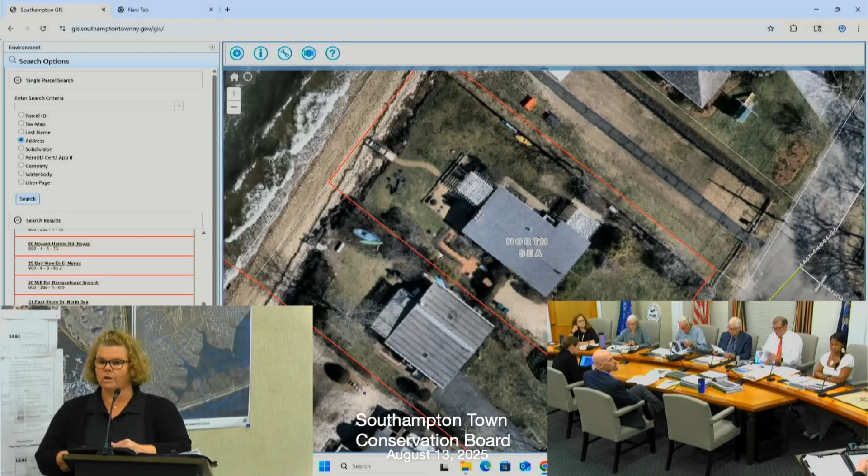So we last met on this project back on May 14th to begin discussion on our application that was filed on June 10th of 2024. We had requested an adjournment for the June 11th hearing date on June 10th.

And this morning at 10:09 a.m., I was provided a sketch by Mr. Shea of an alternative plan dated June 10th. This was not previously provided to me, so it was given to me this morning, but was done two months ago, effectively. So as far as a response to that, that doesn't really give me a lot of opportunity to digest it and actually respond to it.

But at first glance, I don't believe the plan really makes much sense. It insinuates that the existing lawn is higher than the beach by a significant amount. The beach is at elevation 3, with the grade in the existing lawn between 5.5 and 6.5 feet above sea level. But I'm going to go back to that in a few minutes.

So at the last meeting, we discussed the elevations of the five other properties to the north where similar shoreline protection structures were approved by this board between 2018 and 2021. In reviewing the surveys for those projects available in the town GIS, there's no significant difference in elevation between 37 East Shore Drive and the five others to the north — those properties being 43, 47, 51, 57, and 59 East Shore Drive. All of the lowest elevations for the five other structures begin at around elevation 3, 4 in one circumstance, I believe, and go to a maximum height of elevation 8.

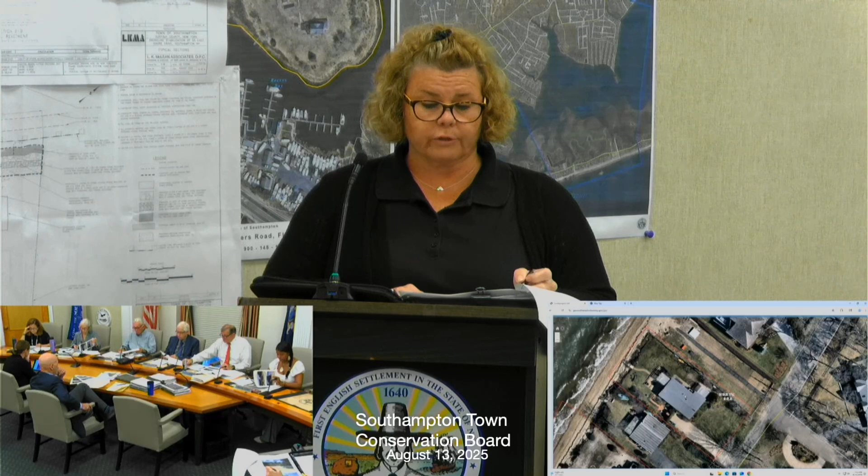Beyond that, you also see the beach has a large amount of cobble closer to the revetments, and then some sand with a mix closer to the water. You see that in all of the photos I'm submitting, which represent 1,000 linear feet of beach in this area, going from the end of the bulkhead, first association access way, all the way down to 21 East Shore Drive.

I wanted you to see this in the summer, because my photos submitted last time were from the spring, so they didn't look as lush and vegetated. You can see the beach grass behind these is thriving, and the rocks in some cases are a little more angled, but in most cases they're stacked one on top of another in a wall situation.

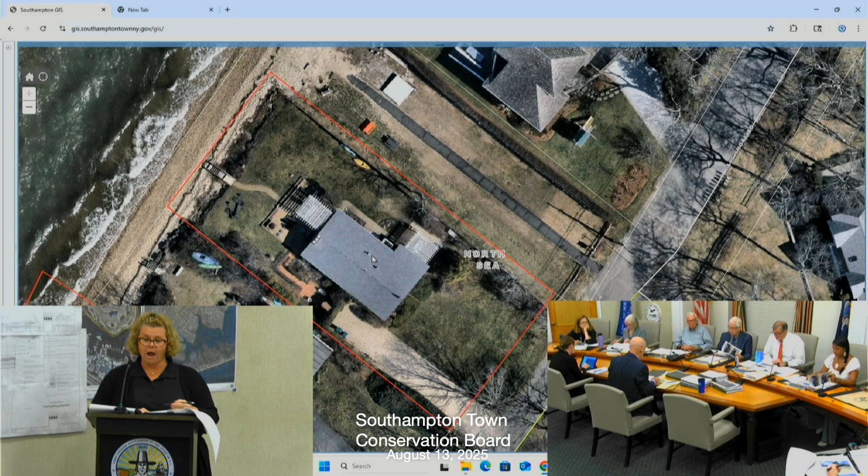I wanted to show the consistency of the width of the beach throughout these photos and the consistency of the makeup of the beach, in that the higher beach area is mainly comprised of cobble, and between the high water mark and that cobble is largely sand. Seaward of mean high water, you start to get more cobble within the water.

That 1,000 linear feet stretches over 11 properties and the association access. That's between my property, my client's property, and 43 East Shore, which is the first and most recent rock revetment that was allowed.

So all of that being said, Marty provided me with a plan that I believe you should have in your file. I don't see it actually. Is this in here? It looks like this. Okay, yes, along with a survey that he designates the areas that he's drawn.

He's proposing a 3-foot wide by 5 to 6 foot high berm of cobble, roughly 2.5 inch to about 5 inch diameter cobble, with a 20-foot wide vegetated buffer beyond that. He's also proposing depositing cobble and sand and planting within that cobble and sand to replace existing lawn.

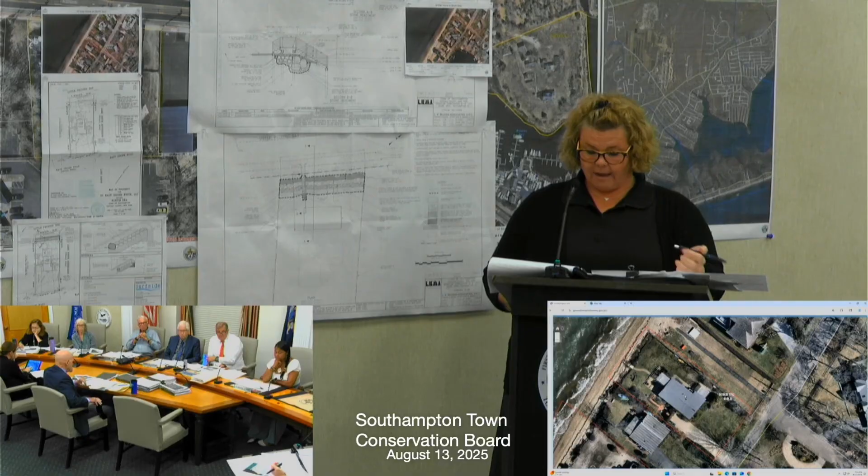We discussed cobble and sand over the rock to be planted to stabilize it. We also discussed the loss of property — we estimate about 8 feet of the property was lost between 2018 and 2024. So the goal here is to maintain what was lost before it gets worse. There was no structural peril on any of the 5 properties, nor is there structural peril on this lot. But the goal is to prevent further erosion of the land. Lastly, the New York State DEC granted us a permit for this with no questions asked on October 16th of last year, so we're sitting on that permit.

Otherwise, I'm here tonight with Nika Strunk, who would like to make a presentation, unless anyone has any questions for me.

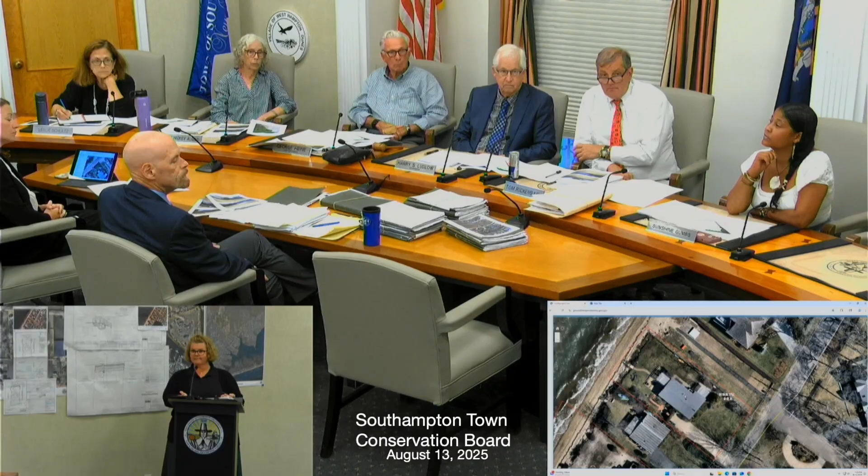It seems like, from what I'm hearing, the thrust of your argument that justifies this project is based on the history of what this board has done on other lots north of this lot. Yes and no — I mean, yes, of course, but also I'm trying to show you that this lot is not significantly different in elevation and grades than those other ones that were granted. There's no natural significant difference between this property and the others.

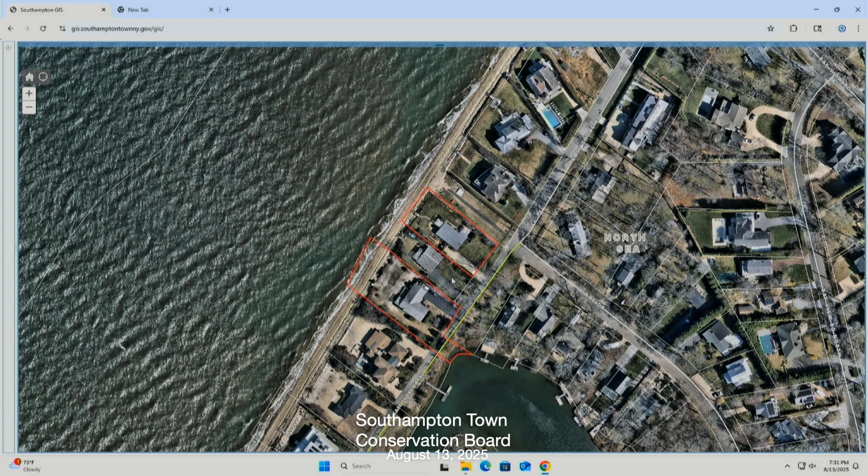And lastly, as a matter of law, which is the reason that I've been brought in here, this board is required to adhere to its prior precedent. It has to treat all applicants equally. I have 2 cases cited in my letter.

One is Hamptons LLC versus Rickenback. You have the cite in there, your counsel can review it, where a special use permit application was, quote, virtually identical to that of a similarly situated property owner in the same zoning district, whose application for the same special use permit had been granted by the appellants. A denial would have been arbitrary and capricious.

There's also the decision of Knight versus Amelkin, from the Court of Appeals, the highest court, that says a decision of an administrative agency which neither adheres to its own prior precedent nor indicates its reason for reaching a different conclusion on essentially the same facts is arbitrary and capricious. So I submit that as a matter of law, given this board's history of allowing property owners on this very, very vulnerable stretch of beach to protect their land, it would be arbitrary and capricious not to grant the application.

And I'm just going to make a little correction to my letter, and I'll submit it this evening. Thank you very much. I'm just going to write my name here. And I'm happy to answer any questions that you may have. Thank you.

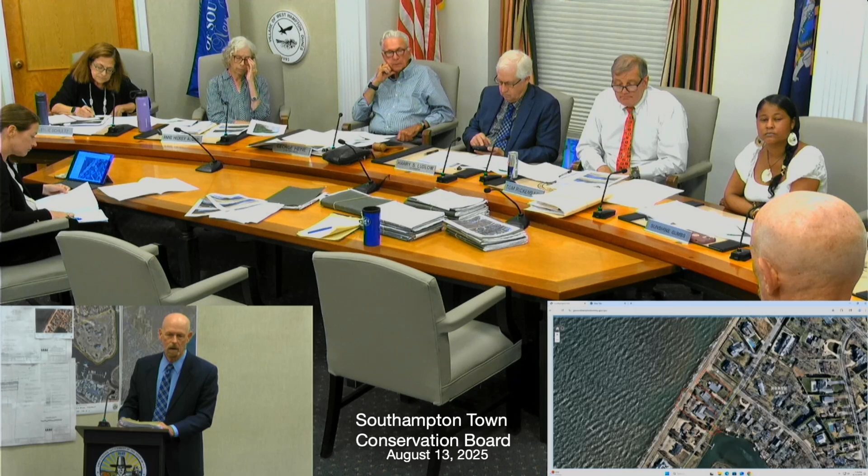Good evening, Marty Shea, Chief Environmental Analyst for the town. Erosion is a natural process. It occurs along every bay beach, along every ocean beach. You have a seasonal change from winter beach to summer beach, periodic storms. The erosion that occurs along beaches is not something that's artificial. It's part of how the natural Bay Beach ecosystem functions.

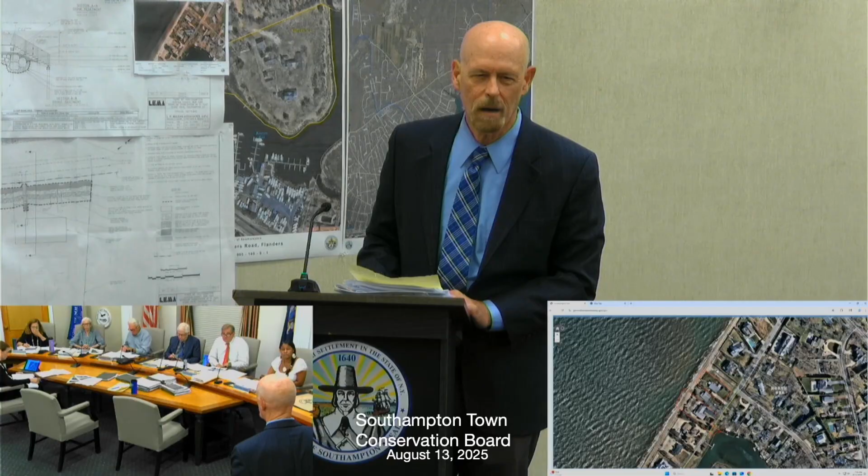The degree of erosion at the subject property right now is not significant. The escarpment is about 1 to 2 feet. The home is actually located outside of the FEMA flood zone, and the improvements are located significantly landward of the beach. So they are at present at no risk of flood or storm damage, nor is there any evidence of some recent damage occurring to those structures as a consequence of winter storms.

While the site conditions at every property are somewhat different, just quickly touching upon the permitting of rock further north, much of that I believe was done as a response and reaction to the court-ordered construction of a 6-foot-high concrete wall at 55 East Shore Drive. There was significant concern on the part of some that the presence of that seawall, which this board did not permit, would have

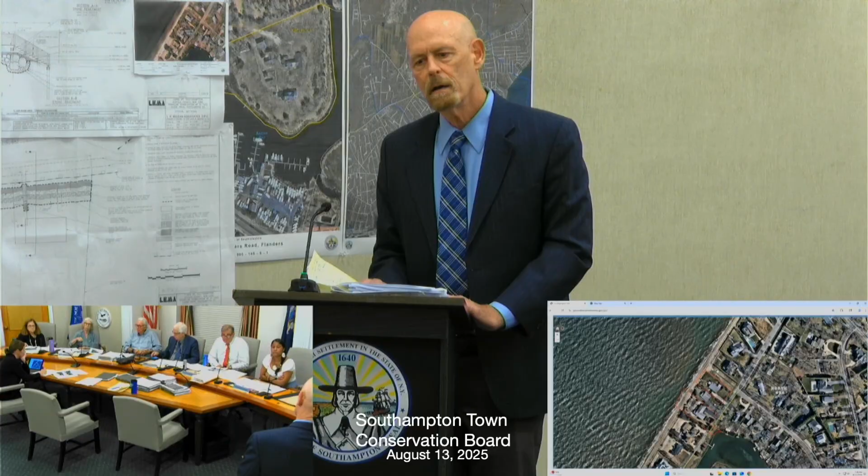potential significant consequences in terms of downdrift erosion. And I think for that reason, the board was kind of in an awkward position. They had to respond partly to proximate neighbor concerns about what impacts over time the presence of that court-ordered concrete seawall on the beach would have in terms of downdrift effects.

When we get an application like this, consistent with the wetland permit issuance standards, there are a number of issues and factors that we need to consider. First, we need to look at whether or not the project plans are reasonable and necessary, considering the present beach erosion and escarpment conditions. And they certainly don't appear to be, there certainly doesn't appear to be a need to do something as drastic as to install heavy rock stone and rock armor along this beachfront.

One of the reasons why there's been some erosion is that this landowner has been looking to continue to maintain a lawn extending from the residence right out to the beachfront. Lawn is very shallow rooted, so when you get a significant storm event and the waters come up high on the property and lap over that edge of lawn, there is nothing to hold the soil together. The lawn easily collapses. And I saw this after Superstorm Sandy when I visited countless waterfront properties that had lawn going to bulkheads or going to beach, they were the areas that were most impacted by storms, whereas properties that had naturally vegetated buffers suffered little or no impact.

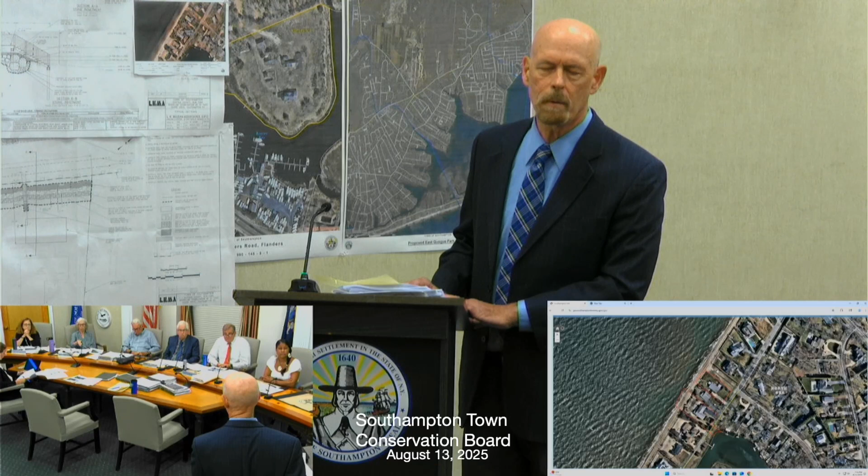So when you change that area by installing rock, you're destroying a lot of that natural upper habitat. You also can significantly modify the topography in a way that interferes with diamondback terrapins.

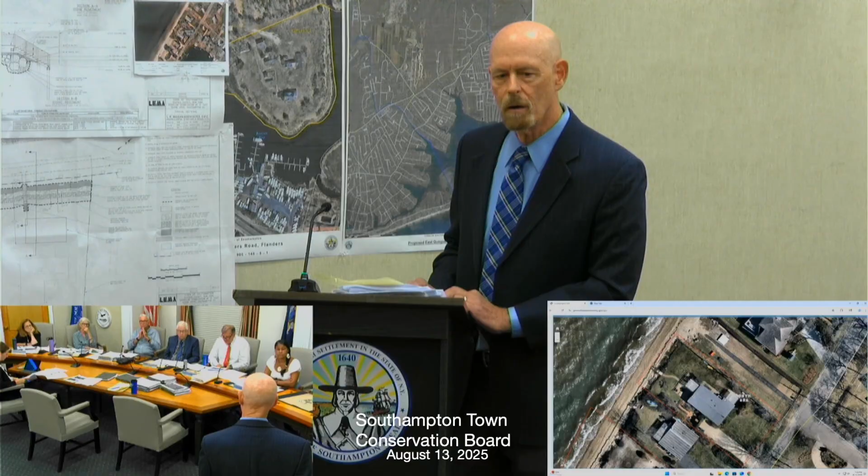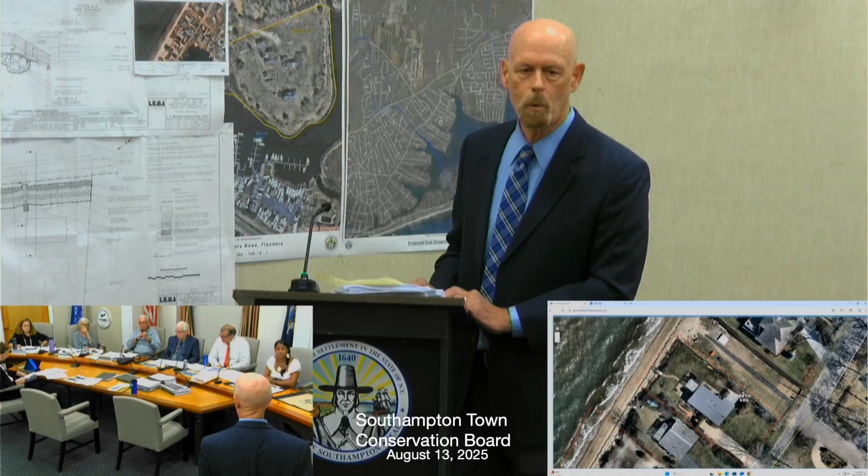Diamondback terrapins are estuarine turtles, and what they have to do is leave the bay and go up to the higher sand and upland areas in order to lay their eggs. If you have rock or major modifications made to the landform, it becomes a lot more difficult for diamondback terrapins to reach those higher nesting grounds. And if they reach those grounds, it becomes a lot more difficult for the hatchlings to return to the bay.

So the area that would be impacted by the construction of the revetment is an essential habitat area for wetland dependent wildlife.

When there is concern about potential environmental impacts, the wetland permit issuance standards require that the applicant evaluate practicable alternatives. The goal of that process is to select the practicable alternative that would be least environmentally damaging to the wetlands, and in this case, the greater bay and beach ecosystem, inclusive of that critical ecotone that takes in the upper beach and transition to uplands.

One of the things I did is spend quite a lot of time looking at areas that are unarmored along Little Peconic Bay at present, and Noyac Bay as well. What I can offer into the record are countless photos of very similar beaches that have naturally occurring vegetation. Some of it is dense, some includes shrubs like groundsel, other areas consist basically of grasses.

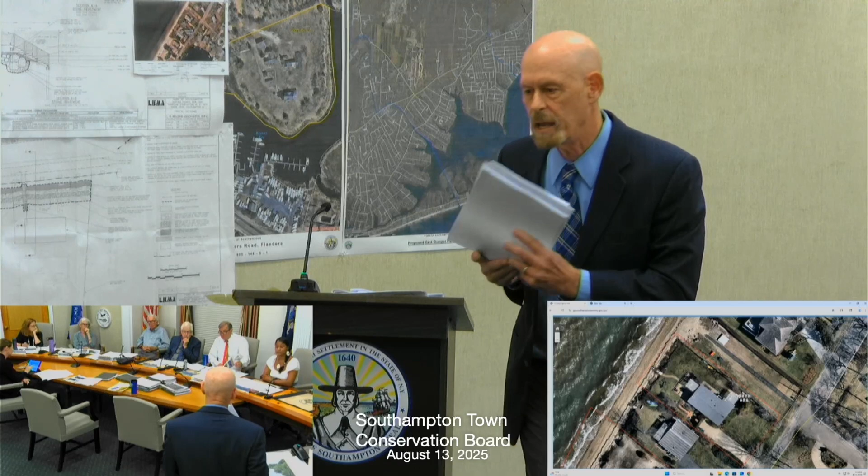While you're looking at the top photo and seeing very dense vegetation on one side, if you go through these photos, and I've indicated where they were taken, you'll see in many cases a similar cobble beach. Many of these areas have a similar fetch as occurs at the subject premises. What I tried to do in these photos is indicate the predominant native vegetation growing in those areas.

What you'll see is if you allow the natural cobble to build up, and potentially replenish that area with additional cobble to create a higher berm, you can achieve the goals of stabilizing the beach.

One photo in particular that will jump out to you, taken along Noyac Bay, is on page 12, showing very similar beach conditions, beaches vulnerable to winter storm events that are predominantly cobble. You can see that this landowner is maintaining a naturally vegetated buffer, only about 20 feet wide, and landward of that buffer they have an extensive lawn area, a wood plat and a sitting area. These conditions have remained static for many years because of the presence of that natural vegetation.

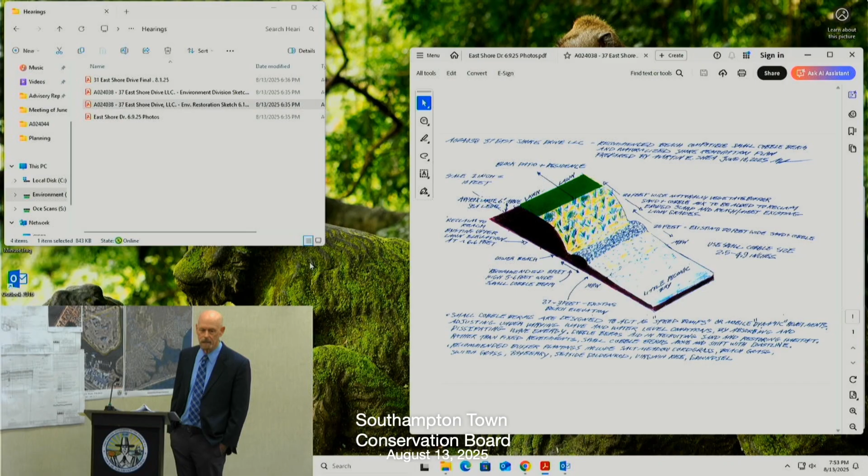The applicant had offered that if the revetment is permitted and it was to be buried with sand and planted with beach grass, the applicant could commit to replenishing the sand and beach grass if that rock revetment becomes exposed, and possibly increases risk of seaward erosion because of deflective wave action.

We tried that in many years past. It's very hard to enforce a requirement whereby every year the beach conditions are monitored, and if the exposure of the rock or erosion exceeds a certain threshold, then the landowner is required to spend significant amounts of money to replenish the sand and beach grass. Many of these properties change hands frequently, and I, for one, would not want to put that kind of burden on the landowner, that every year they're under the gun that in the event the permitted rock gets exposed, they're going to have to spend the money to place sand above that rock.

The difficulty with revetments is if indeed they do become exposed, even if you place enormous amounts of sand over that revetment, the sand quickly filters down through that rock. It dissipates over time. It's easily impacted by high water events, impacted by rainwater and runoff as well.

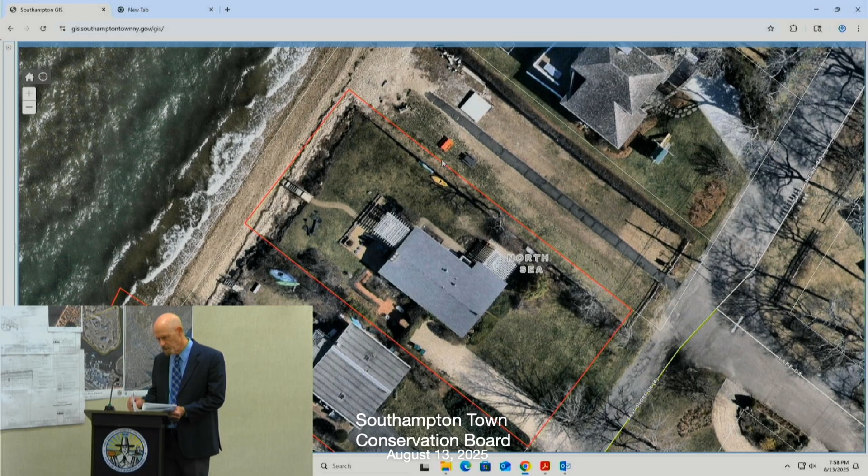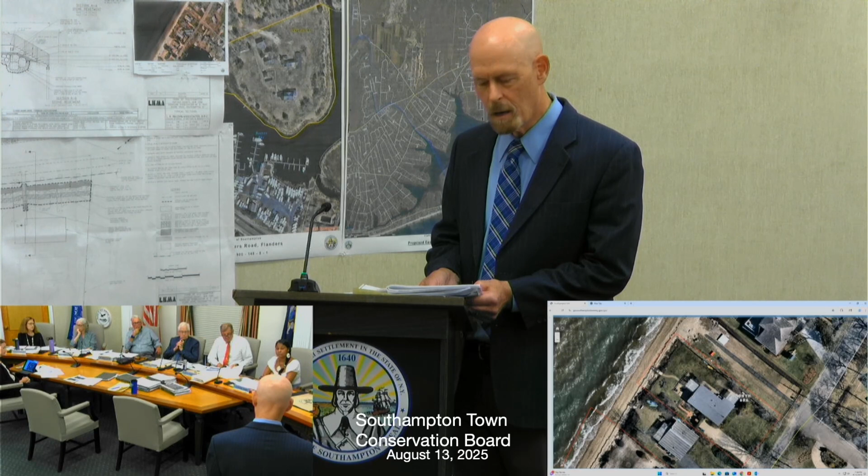And I would just mention, I think the board has a copy of my survey on which I sketched the recommended cobble berm and 20-foot buffer as well. Thank you.

As many of you may know, I have, for the past 24 years, been working in the town of Southampton, either as a town employee or on the private side. In the past 24 years, I have done permits for both sides, up and down this stretch. I have been going to this beach for 24 years.

Looking at this bunch of photos that Marty provided, the main difference between these beaches and this beach is that these beaches in this packet are entirely cobble. There's very little sand here. Where here, historically, there has been cobble, some sand, and then some more cobble in and out of the water. This beach has never been like these. It just has never been this way, to my knowledge.

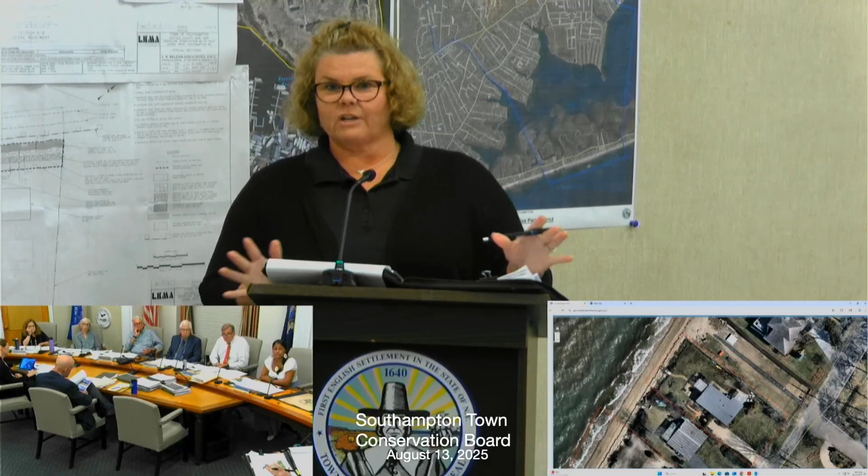Let's be dramatic. Most of the year, water is not touching this high part of the beach, as evidenced by the photos I just gave you. The water is way down, mean high water is far away. But in the winter is when you're seeing these problems, because of the west-facing properties. I noted this at the last hearing — the need for this is not for the majority of the year, but it is for the part of the year that's pretty serious.

So that's it. What else? I think that is all I have. Nika, do you have anything?

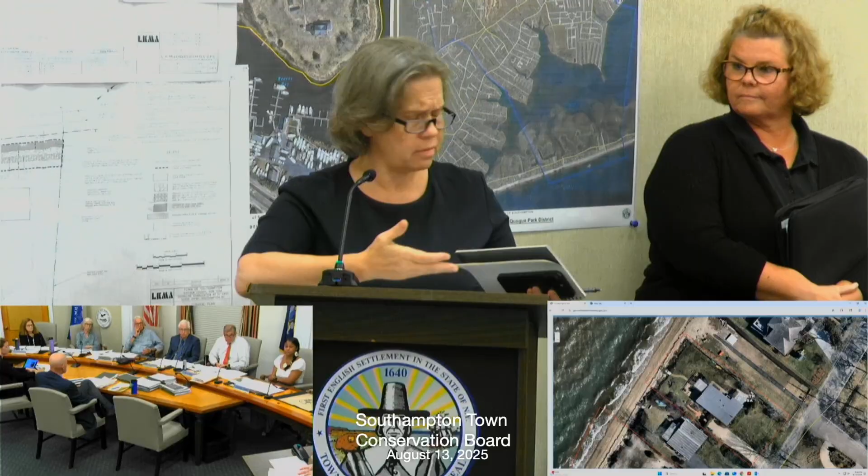I'll just quickly say that the photos, I think I saw a date on them of June 9th, and the drawings were dated June 10th. We just got them. So I think it would make sense for us to adjourn to a later date so that we can really give a complete response to what has been suggested here. That's all I ask. Thank you.

Thank you. We need to wrap this up to get on with the rest of the agenda, but I just want to summarize what I've heard and seen, and the board can add to that if they see fit. There are a few things that have come out in this discussion.

One is that the essence of the legal argument is this should get a structure because another place got a structure. Another argument is that there is significant erosion here. These are the parts of the applicant.

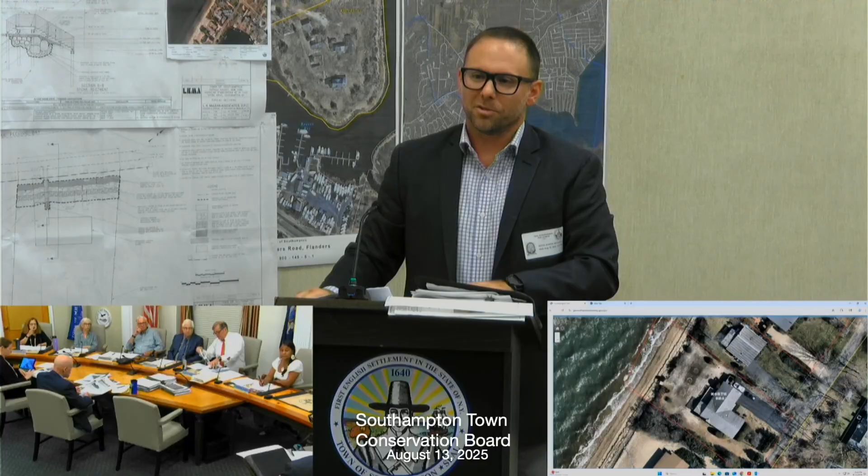I have a couple handouts. Would that be possible? I don't have enough to pass around. It's, I think, 4 total. Is it possible for everybody to share? Anything you hand out's gonna be retained. You have to have it stamped in first, but even if it's not enough copies, share it.

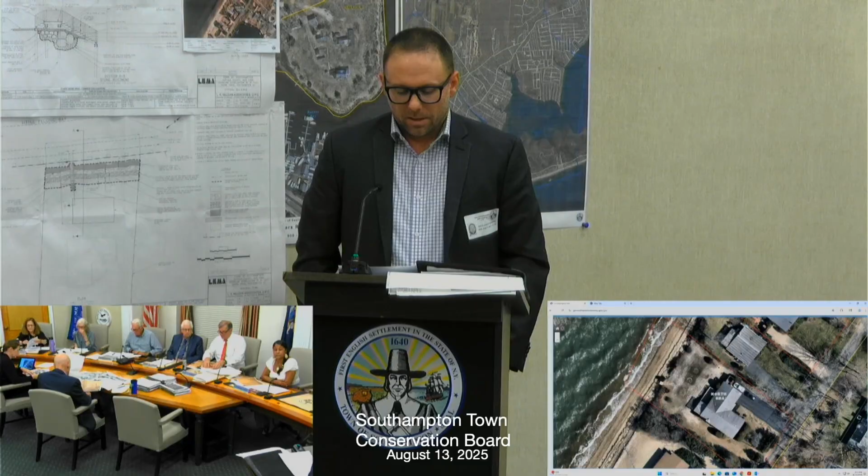Good evening, everyone. My name is Keith Maseria. I'm a civil engineer from LK McLean Associates, representing the owners of 31 East Shore Drive in Southampton. At the last public meeting on May 28th, I presented a shoreline stabilization project which involved the construction of a stone revetment, timbered beach access staircase, and a 10-foot wide vegetated buffer.

Because our design was not well received by the town, we went back to the drawing board and came up with another alternative, in addition to what was described in our alternatives analysis provided to the town. The design is similar to what was originally proposed, but we've made changes: we reduced the overall size of the revetment, originally 4 larger stones, currently 3. We lowered the top of the revetment slightly, and extended the beach profile up and over the top of the revetment.

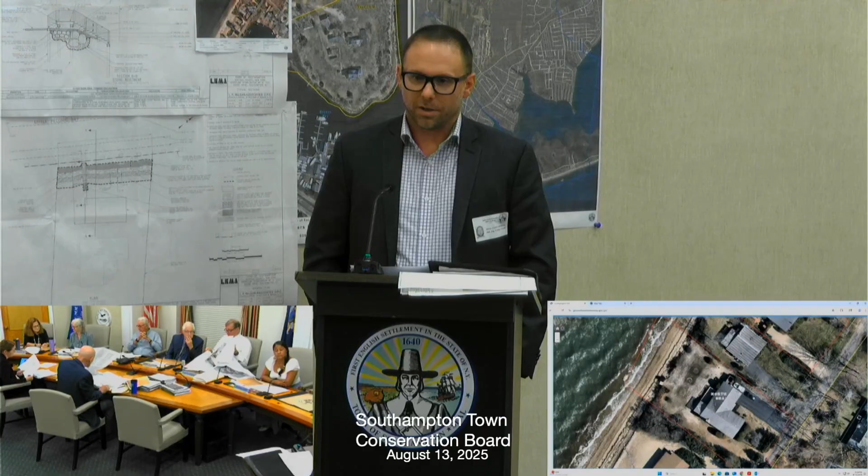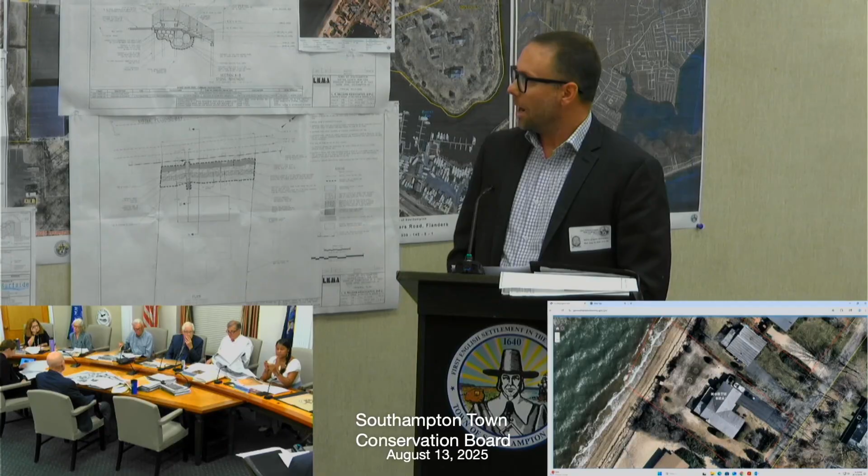The staircase, as well as the 10-foot wide non-turf buffer, remain landward of the cobble on top of the revetment. The cobblestone, which is to be placed on top of the revetment, will match what is currently on the beach, maintaining the existing habitat at the site. The homeowner, in good faith, has also agreed to replenish the cobble as necessary to prevent exposure of the revetment, which will maintain the aesthetics of the beach and the existing habitat. As the beach erodes over time, the homeowner has agreed to fill that area back in.

During the design process, wave heights used for the evaluation of various shoreline protection features were calculated by our engineers in accordance with the U.S. Army Corps of Engineers Shore Protection Manual, with a fetch of approximately 5 miles to the northwest. These calculations can produce wave heights upwards of 7 feet, depending on the still water conditions at the time of the storm event. As stated in the New York State Department of Environmental Conservation Tidal Wetlands Guidance, dated 2017, vegetation can't withstand waves in excess of 5 feet. I find that to be closer to 2 or 3 feet, but the calculations show the waves would be well in excess of that, so in either case, vegetation alone would not survive here.

Based on these calculations and our observations of the shoreline, we find it necessary to harden the shoreline through the construction of the revetment.

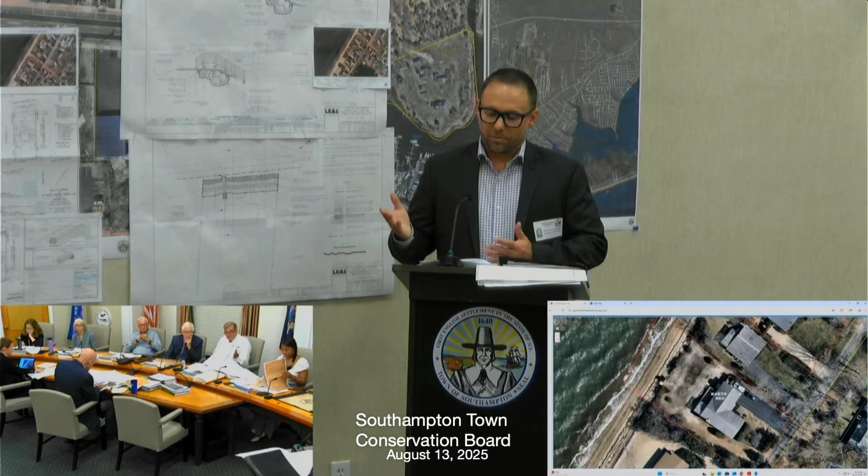At our last meeting, it was discussed how much of the beach has eroded, and I didn't have a great answer, but I said it was several feet. In reviewing the historic surveys provided by the homeowner, on average between 1964, 1974, and today, the erosion is approximately 15 feet between the high water marks, meaning over the last 51 years or so we've lost approximately 3.53 inches of beach per year.

What happened between 1974 and today? Maybe there was a big storm, but either way, sometime between then and now, this beach has receded approximately 15 feet. This does vary with the seasons, but without a regular supply of sand on this beach, as a result of a lot of updrift structures that have been installed, there's not a regular supply, and therefore the beach is not going to continue to be restored.

As previously mentioned, shoreline stabilization features have been implemented at 43, 47, 51, 55, 57, 59, and 65 East Shore Drive. What we're proposing represents, I think, the least robust of all the ones along that shoreline, and it seems to be holding up well.

Not only will this serve to protect my client's property from the wave action, but in the event that this stone actually does wash out, it will continue to replenish the beach on the downdrift ends and in the areas in front of the stone that will be temporarily exposed.

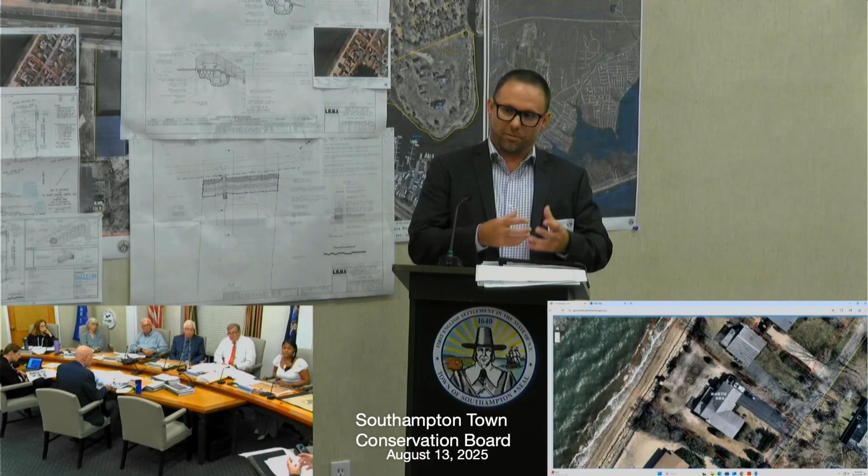Correct. And so what we are doing here is we bury the stone beneath the ground to prevent that top layer from becoming undermined. So in the event that beach does keep dropping, and say the water is deeper, our stone will still stay in place. That's why it's critical to make sure that's buried as far as it is.

But the fact that we're replenishing it, the homeowner at 43 is also replenishing it. Maybe these sort of measures will prevent this same rate of erosion, might be less, like with the added cobble to the beach. Does the lack of the beach in another 50 years concern your client?

I think that it would, yeah. But probably if this structure is put in, there will be no recourse. The die is cast. The beach goes.

I don't think that this is going to cause any erosion. And I think the fact that he's adding the soil or the stone back to the beach is going to slow that rate of erosion down.

I don't think adding stone changes the rate of erosion. It just changes where the erosion is going to be. It's going to be in the beach, and when the beach gets used up, it's going to be what's added.

That is very concerning to me, and also concerning to me is how that might affect other homes nearby. I would say majority of the homes, there might be like 3 or 4 total along the stretch that don't have some sort of hardening feature.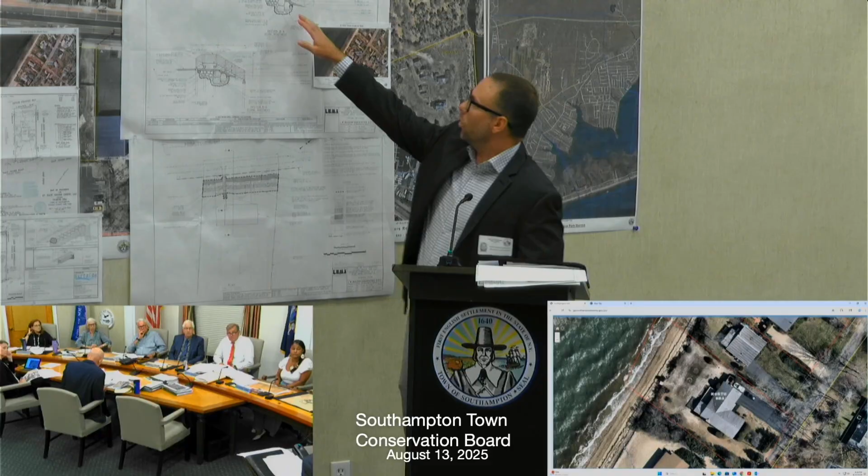So when you say, our revetment, quite honestly, it's like 2 feet high. It's like one large rock. You know, we're trying to just lock in the end of this property.

I do think we're almost following the exact slope of the beach. It's a very minor improvement here, in addition to the fact that we are taking the lawn out. So I think all of these aspects combined should help to keep this area stable.

And I do think that replenishment, though, of this property as well as the other properties will slow down that rate of erosion. Are you proposing a buffer from the crest of that revetment towards the house?

Yeah, it's 10 feet. So currently the homeowner has grass between the escarpment, we'll call it, all the way back to the house. And there's some sort of upland species kind of mixed throughout that would be replaced with American beach grass and some other native wetland plantings.

Okay, I may have questions later. Marty?

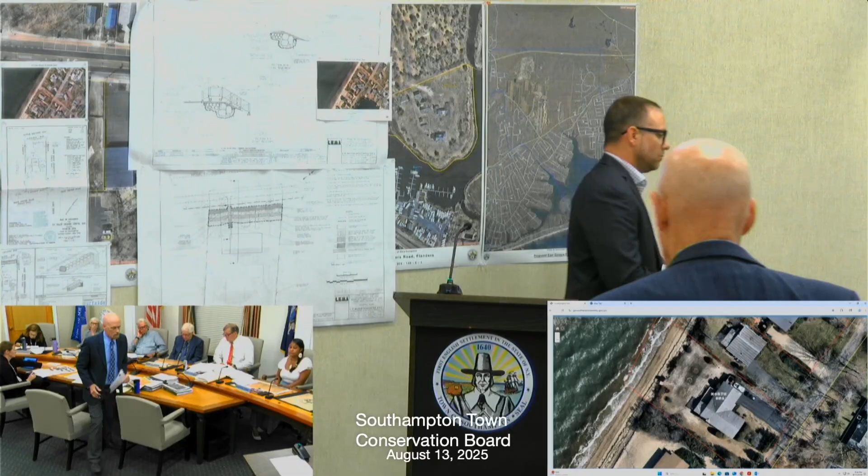Good evening, Martin Shea, Chief Environmental Analyst for the town. As was discussed at the first hearing on this application, I see nothing about the current conditions or the historical trend in erosion at this property that would warrant installation of an engineered rock revetment. There is a preliminary advisory report on file dated April 17, 2025 that details the concerns that I have with regard to potential adverse wetland impacts resulting from armoring of a shoreline.

The residence is located outside, landward of the FEMA designated flood zones. So the residence is secure. This is notwithstanding that there may have been some retreat in the shoreline over 50 or more years. The improvements are located at significant setbacks landward of the beach. So there is an opportunity for the applicant to continue to enjoy their property without making some massive changes to the beachfront.

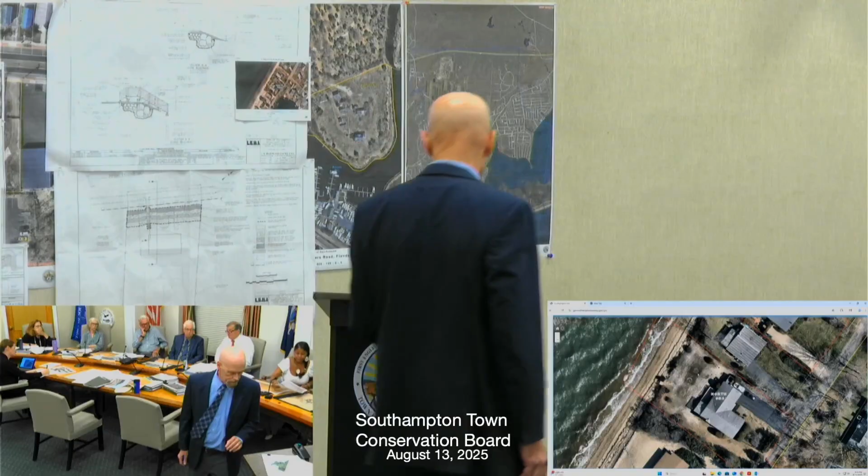At the first hearing, I had shared with the board photos of the subject beachfront. I'll hand those up again. Notwithstanding that winter storm event had damaged some vegetation on the upper beach, the beach is stable. The applicants are looking to maintain a lawn extending almost entirely to the beach. Lawns are shallow rooted—when you have storm events where high water comes up, the lawn can't hold that soil. So the presence and continued maintenance of an expansive lawn is only contributing to the erosion at this property.

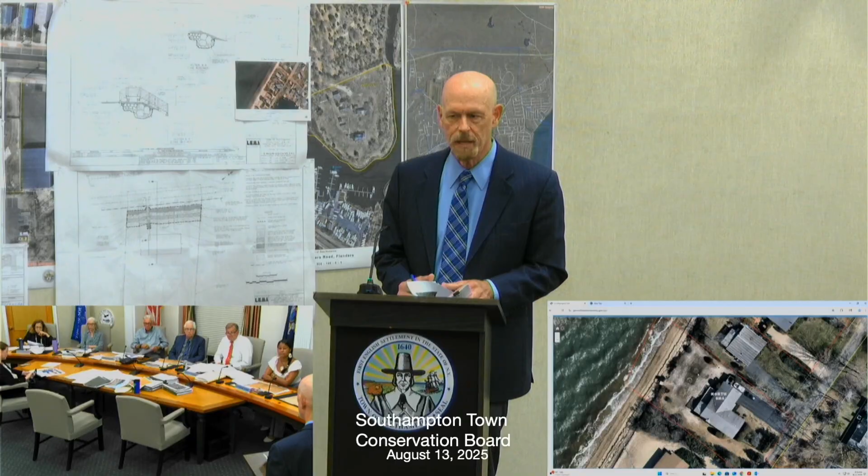Again, as part of the record for this hearing, I can offer photos that were shared with the board at the prior hearing of other naturalized beaches in the area, which I will share with the applicant. That shows that significant upper beach cobble and natural vegetation can be very effective in achieving the goals of providing good stabilization of the beach.

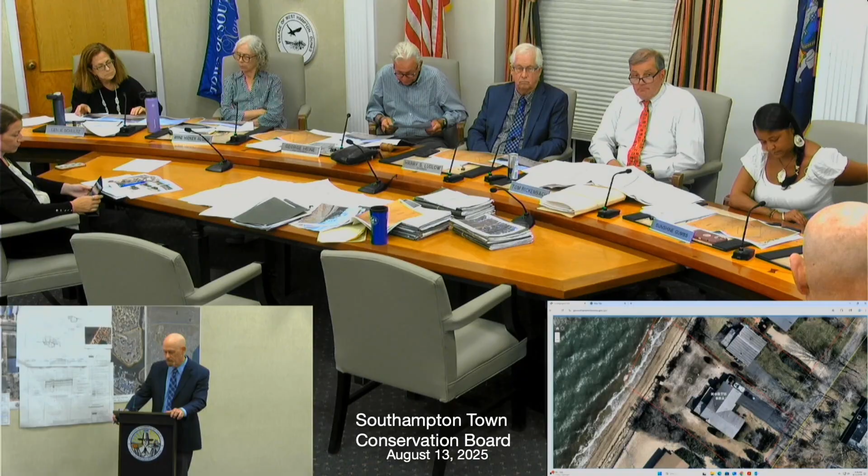So I'm not convinced at this time that the applicant has demonstrated that there are no environmentally less damaging practicable alternatives. I'm also not convinced that the construction of a rock revetment is warranted. There is no emergency at this property.

And while conditions, of course, could continue to be monitored to see if there are drastic changes in the shoreline, I think if the applicant comes forward with a plan for further replenishment of that upper beach with cobble, backed by significant native vegetation and establishment of a buffer at least 20 feet, you in all likelihood are going to see significant benefits in terms of stabilizing that upper beach.

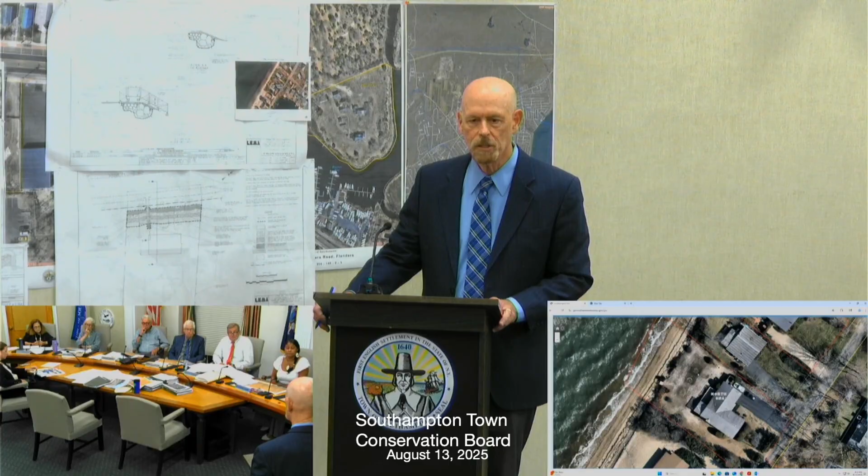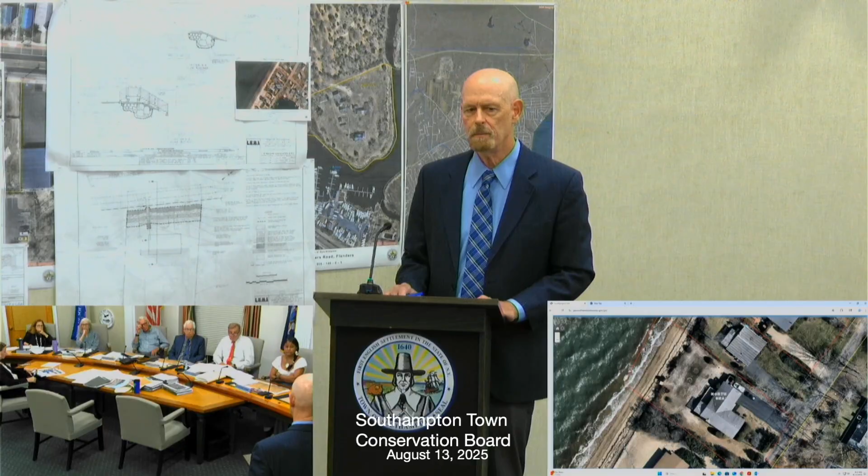The property is large enough that, notwithstanding any natural shoreline restoration that I'm recommending, the applicant will still benefit from an expansive lawn seaward of the residence. So I just, at this time, don't see that the project plans meet the standards for wetland permit issuance, because the applicant needs to make a clear demonstration that there are no other practicable alternatives. And that includes natural shoreline restoration, elimination of some of that lawn, heavy planting of the types of natives that you see at these other naturally stable beaches, and continued monitoring of the property. Thank you.

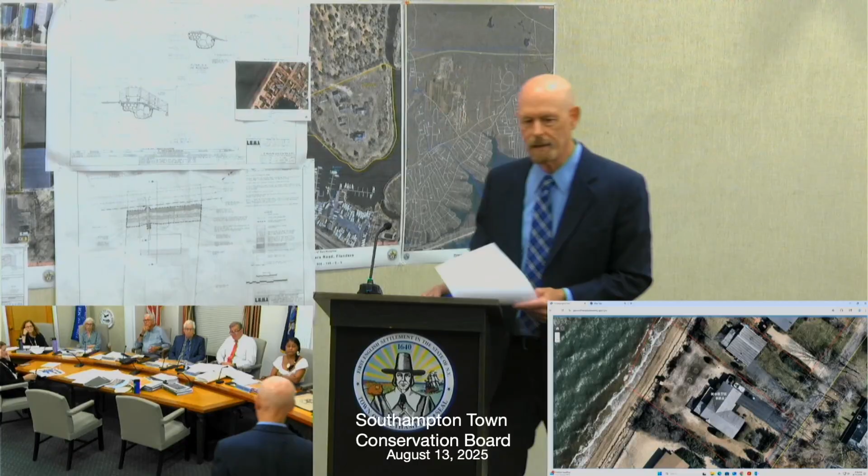Yeah, I'll just touch on a couple of the points that were made. We understand that it's a burden for the homeowner to have to replenish the cobble, but he has agreed to do that because he's obviously in favor of the project.

We find that the revetment, in theory, is consistent with a lot of the photos provided, in that you wouldn't even see it. So it's going to be acting in the same manner for 95% of the time. There might be some temporary instances where it becomes exposed, but then the homeowner would have to recover that revetment again.

And regarding the photos that were provided, every site's different. Wave calculations are based on the depth of the water, the wind direction, the fetch of exposure, the seasons that impact it, the temperature of the air and water, and a lot of other things. So there might be an instance that is okay—this picture looks great here, but I'm sure they're not getting 7-foot waves, because if they were, this wouldn't survive. That's my opinion.

I would have to look into some of these a little bit more closely, but vegetation, generally speaking, does not survive in a high wave energy environment, which our particular site is located in.

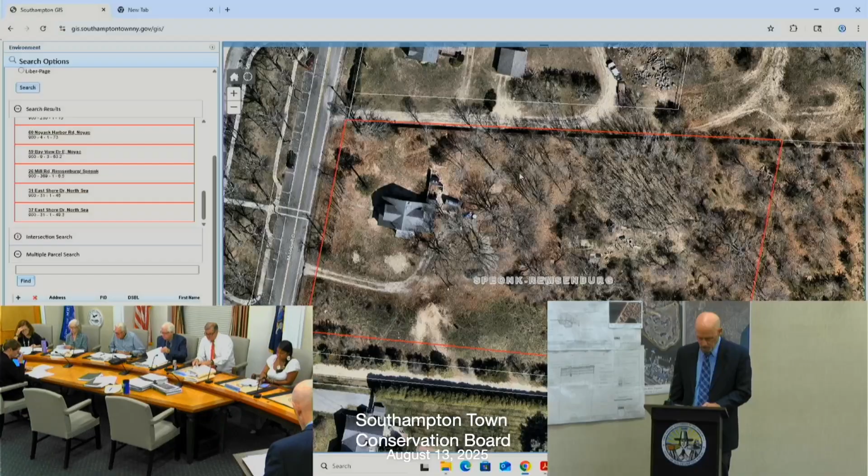Pending residential two-lot subdivision application for a tract that's partially developed at 26 Mill Road in Remsenburg-Speonk. There are several recommended comments. First, pursuant to section 292-39B, draft conditions of final conditional map approval relating to wetland preservation will need to be forwarded to the Conservation Board for future consideration and adoption of a resolution, as the rear portions of proposed parcel 2 appear to lie within 200 feet of town regulated wetlands to the east.

Second, the survey depiction of proposed parcel 2 as a wooded area is incorrect, as based upon an August 6, 2025 Environmental Division field assessment, more than 15 large native trees were recently cut and felled without authorization, destroying key forested watershed land for the proximate upper Speonk River, as well as showing disregard for the environmental benefits once offered in terms of thermal cooling, carbon sequestration, and air purification. This is particularly concerning in light of recently documented record-breaking average high global temperatures and what unfortunately appears to be an unstoppable climate change. Habitat for native flora, insects, songbirds, eastern box turtle, white-tailed deer, and other wildlife was also affected. The merits of the wooded property in terms of maintaining community character, as well as potential need for a wetland permit prior to tree cutting and site disturbance, appear to have been largely ignored.

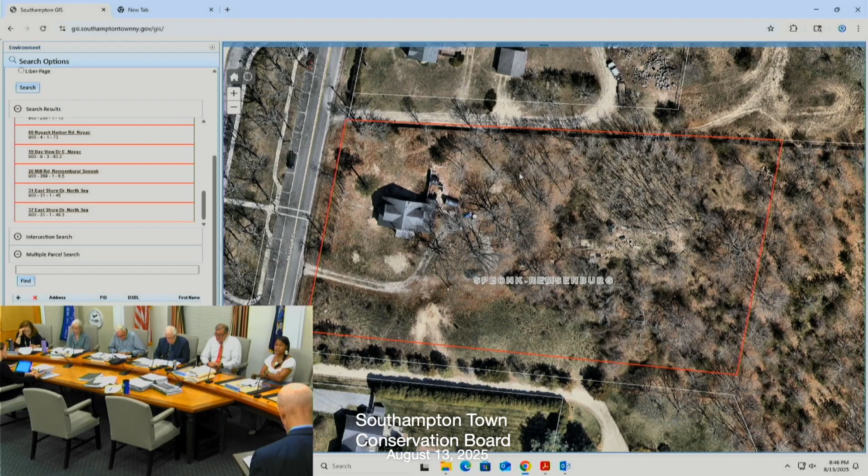Thirdly, this resulting environmental damage needs to be countered by requiring that the remaining large white oaks and eastern red cedars be protected to the maximum extent practicable, and by requiring that significant portions of the tract be reforested. In that regard, any pre-application approval strictly should be conditioned upon the applicant coming forward with a native tree planting and partial woodland recovery plan. Additionally, natural land needs to be protected at the rear of parcel 2 in order to bolster and support the abutting 1.8 acres of town preserved land to the north.

Fourth, a conservation easement needs to be utilized as a means of establishing and preserving a wildlife movement corridor and dispersal route, as well as a natural habitat connection with the abutting northerly town preserve. Creation of a minimum 50-foot wide conservation buffer is being recommended along the easterly rear lot line of parcel 2.

There's one more recommended comment. Lastly, the subdivision map also needs to be revised to note that construction of a new dwelling on parcel 2 will be conditioned upon installation of a new IAOWTS, thereby lessening negative effects on ground and surface water quality.

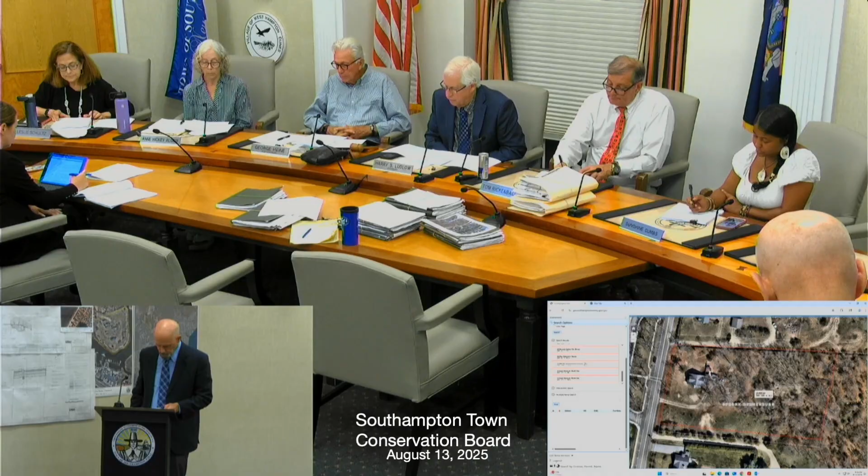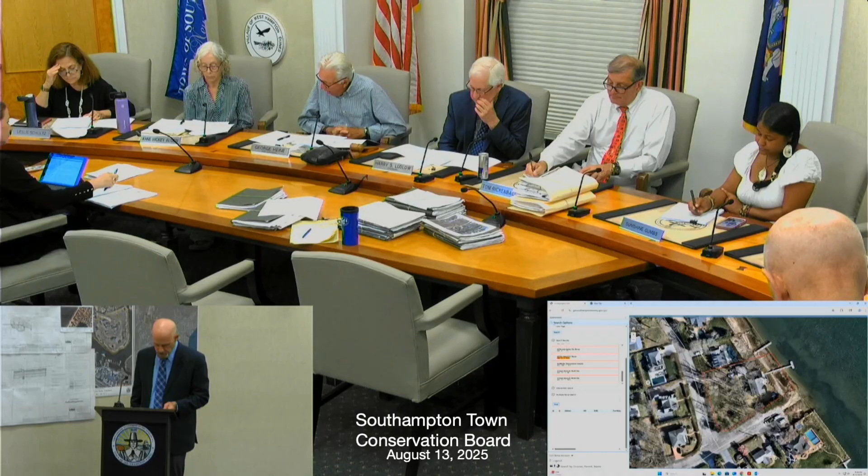This pending variance application relates to an existing developed property that just received Conservation Board approval to be redeveloped at 59 Bayview Drive East in the hamlet of Noyac.

There are 3 recommended advisory comments. The first confirms that the survey prepared by Paul Borelski, dated August 5, 2024, last revised June 10, 2025, which was filed with the pending variance application, has already been conditionally approved by the Conservation Board on June 11, 2025, contingent upon recording of a covenant establishing wetland preservation area, naturally vegetated wetland non-disturbance, non-fertilization buffer extending 75 feet landward of the wetland boundary. Two, notwithstanding this approval, the uplands at the site are marked by a considerable number of mature

Native trees with significant value in terms of community character, carbon sequestration, thermal cooling, air purification, wildlife habitat. Thirdly, tree protection zones should therefore be established wherever practicable to minimize tree loss and preserve these benefits.

Motion to send those comments to the ZBA. All in favor? Aye. Opposed? Dana R. Rubin and Robert J. Gottlieb.

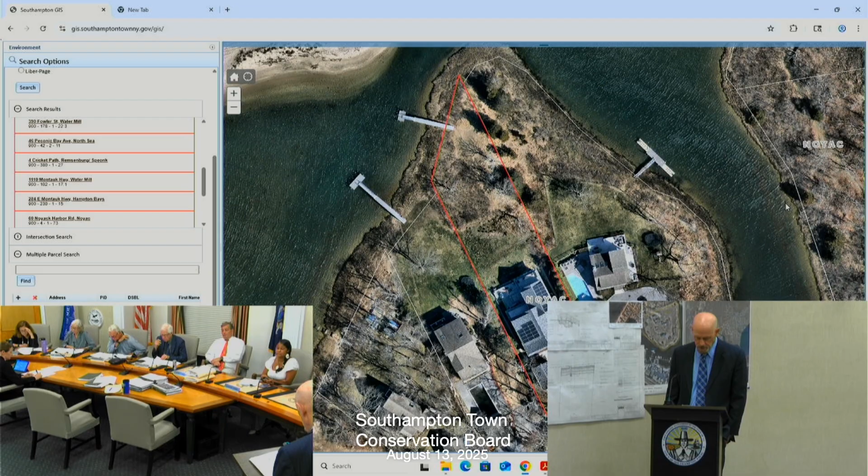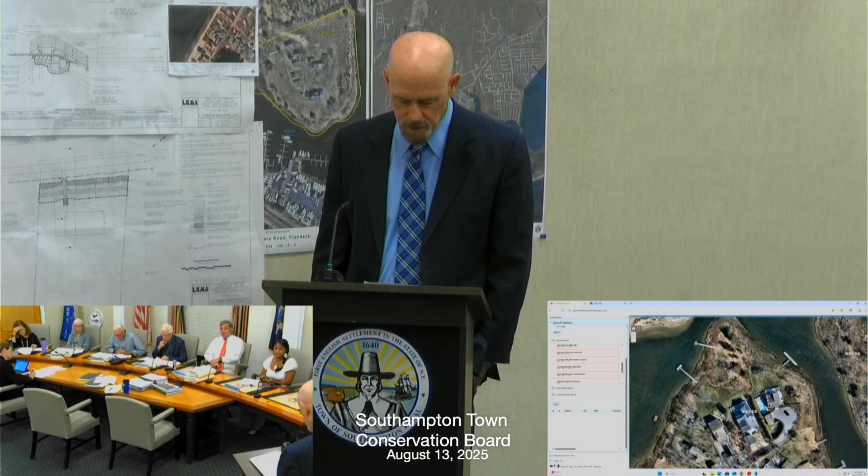Two, certificate of wetland compliance number CWC 220003 was granted on January 25, 2022, thereby deeming the improvements compliant with the terms and conditions of permit CB 18033 and closing out the wetland permit. Lastly, no additional wetland permits or approvals are needed to authorize the garage conversion to accessory apartment.

Motion to send those comments to the ZBA. All in favor? Aye. Opposed? John and Meredith Noonan.

The Noonan application relates to residentially developed property at 224 East Montauk Highway in Hampton Bays. There are 2 comments being offered. The first is that the proposed residential redevelopment plans as depicted on the survey as prepared by Ralph Heil, dated November 5, 2020, with the latest revision date of September 12, 2024, for which a variance is being sought, received a letter of wetland non-jurisdiction pursuant to Chapter 325 of the Town Code on December 5, 2024.

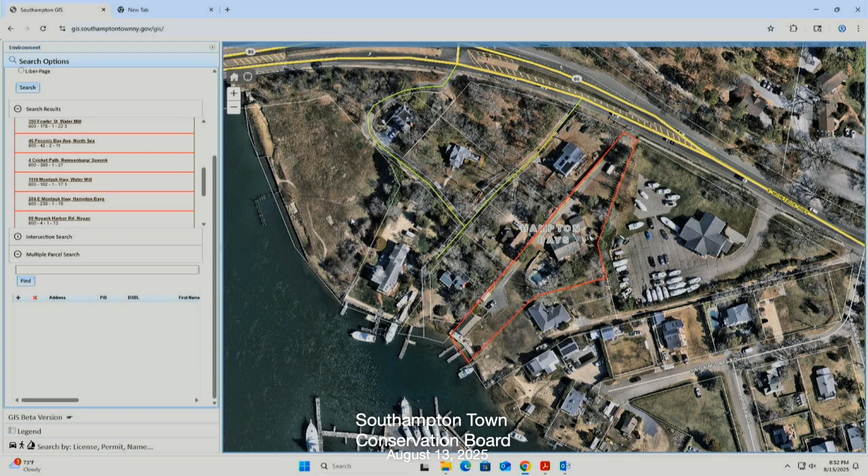And second, no wetland permits or approvals are needed. Moreover, as an IAOWTS is being installed, there are no significant environmental concerns regarding this application. Motion to send those comments to the ZBA. Second. All in favor? Aye. Opposed? Watermill Building Supply Realty LLC.

This pending variance application relates to a subdivision that's being considered by the planning board. The tract is located on Montauk Highway in Water Mill. The first comment confirms that the tract, which is proposed for subdivision, is located greater than 200 feet landward of the nearest town-regulated freshwater wetlands.

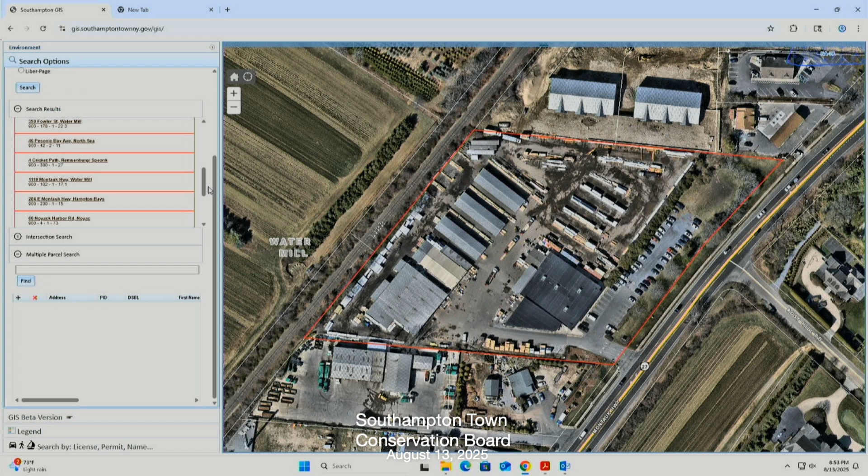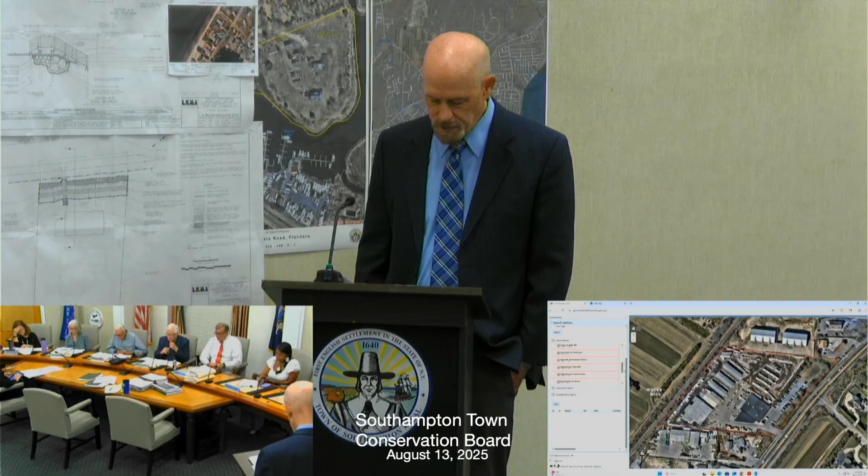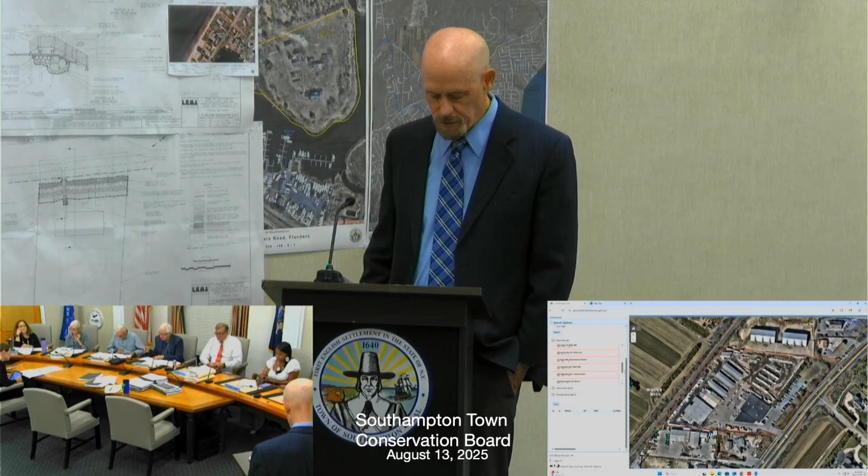Second, it's indicated as the tract is located within the town's high priority water quality improvement zone and the county designated Mecox Bay and tributaries watershed. The new commercial building should be serviced by a nitrogen reducing IAOWTS with intended sanitary improvements detailed on the subdivision map. And lastly, the new commercial building should be equipped with solar panels, in order to reduce energy demand. Motion to send those comments to the ZBA.

Second. All in favor? Aye. Opposed? South Dune Builders LLC. This relates to a residentially developed property at 4 Cricket Path near hamlet of Remsenburg-Speonk.

First, it's indicated that the planned first and second floor residential additions for which variances are being sought are located greater than 200 feet landward of the nearest town regulated wetlands. Thus, the planned improvements do not require a wetland permit.

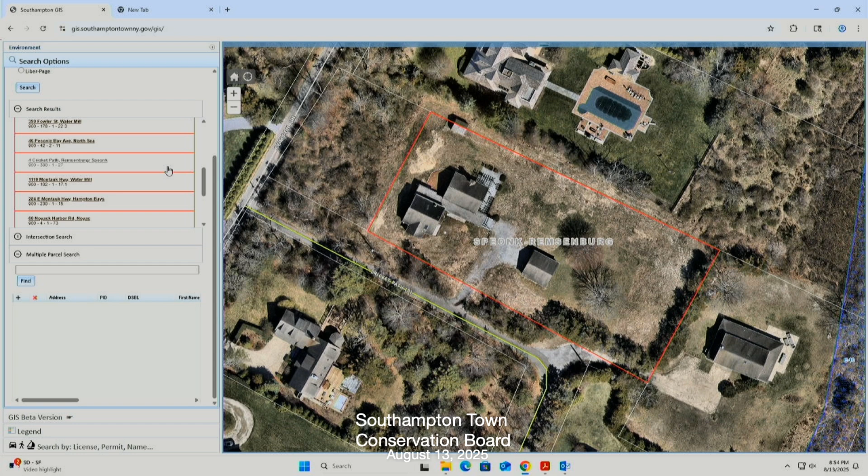Second, as significant home expansion is planned, a nitrogen-reducing innovative alternative on-site wastewater treatment system needs to be installed. And thirdly, the location and configuration of the intended IAOWTS needs to be shown on the survey. Motion to send those comments to the ZBA. Second. All in favor? Opposed?

Martin Vidgefinkel and Julie Jalima. This pending variance application before the ZBA relates to residentially developed property at 46 Peconic Bay Avenue in the hamlet of North Sea. There are two brief comments being offered.

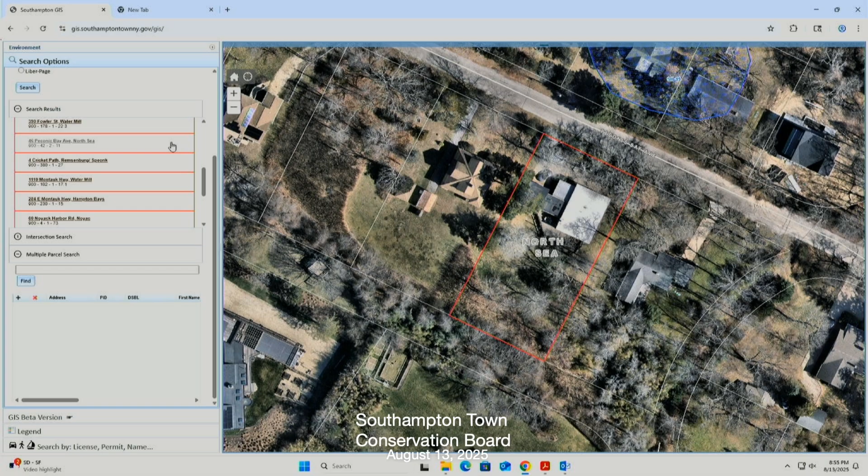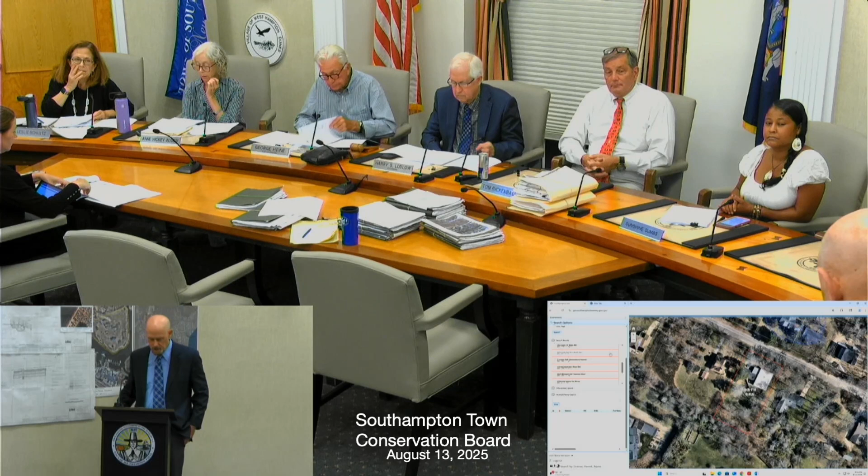The first indicates that, as stated by the applicant, the planned improvements for which a variance is being sought have already been authorized pursuant to Conservation Board Wetland Permit number CB 22035. And second, Administrative Wetland Permit number, renewal number REN 25043, CB 22035-1, was issued on August 6, 2025, thereby extending the term of the permit to July 29, 2026. Motion to send those comments to the ZBA.

All in favor? Aye. Opposed? The administrative wetland permits are in your packets.

Resolution of conditional approval, A 021077, Anthony Rapillo. This is postponed to August 27th. Motion to postpone to August 27, 2025. Second. All in favor? Aye. Opposed?

A 024044, Bradley A. Edgar and Lauren D. Edgar. Any discussion? Move to issue. Resolved that a conditional wetland permit approval be granted to Bradley Edgar and Lauren Edgar for the proposed project, the terms and conditions set forth therein. All in favor? Aye. Opposed?

A 024068, 134 Middle Pond Road LLC. Any discussion? Move to issue. Second. Resolved that a conditional wetland permit approval be granted to 134 Middle Pond Road LLC for the proposed project of the terms and conditions set forth therein. All in favor? Aye. Opposed?

A 025020, Burnett 2012 Family Trust. Any discussion? Move to issue. Second. Resolved that a conditional wetland permit approval be granted to Burnett 2012 Family Trust for the proposed project, the terms and conditions set forth therein. All in favor? Aye. Opposed?

Preliminary review significance determination, A 024062, 390 Fowler Lane LLC. Marty Shea, Chief Environmental Analyst for the town: this application relates to residentially developed oceanfront property that also has frontage on Jule Pond and contains extensive wetlands. The application has been made, as indicated by the July 30, 2025 preliminary advisory report, in order to seek a wetland permit to undertake a pilot Phragmites management project in the interest of enhancing native biodiversity.

The work would be accomplished by repeated selective hand cutting and removal of Phragmites while avoiding trampling and disturbance to other native vegetation. No herbicides would be utilized. I have put forward a plan that the applicant has agreed to, wherein, in addition to removing unauthorized deer fences as part of the work, the Phragmites management would adhere to strict seasonal restrictions to avoid potential adverse impacts to breeding and wintering wildlife. The work would also be phased in.

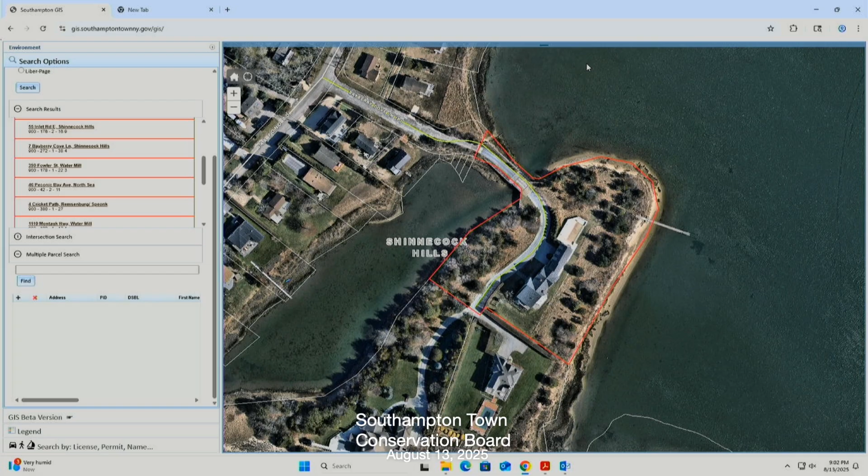This application relates to an existing residentially developed property. There is quite a large residence that was permitted at the site as a condition of that permit. The landowner has established an extensive covenanted wetland preservation area, an expansive naturally vegetated wetland non-disturbance, non-fertilization buffer. There are accessory improvements at the residence that the applicant is seeking to upgrade and change. The entirety of the work would conform to the minimum required wetland construction setbacks.

There is some remaining fencing in excess of 6 feet, which needs to be removed. At the site, there are also some incursions in the buffer, and the applicant is going to come forward with a plan to restore those areas of site disturbance. This is an application for which we have sufficient information to make a determination. As such, recommending that the public hearing requirement be waived.

Motion to waive the public hearing. Second. Resolved that the Town Conservation Board hereby waives the public hearing requirement pursuant to Chapter 325, Section 325-80 of the Town Code. All in favor? Aye. Opposed? A 025010 Firefly Pond LLC.

This application relates to a property that has frontage on Cold Spring Pond, an extensive tidal wetlands. There is a preliminary advisory report dated August 6, 2025, which details the accessory improvements that are being planned at the site.

There has been a landward advance in the extent of wetlands at the property, as found by the applicant's consultant. The applicant has proposed to file a new covenant preserving those wetlands and establishing a buffer extending 75 feet landward of the wetland boundary that would be fully restored to site suitable native vegetation.

However, a portion of the pool patio, which the applicant is looking to extend, would come at its closest point less than 100 feet landward of wetlands. So I have recommended a partial expansion of the buffer beyond 75 feet and that area be restored, which the applicant has agreed to. This is an application for which we have sufficient information to make a determination.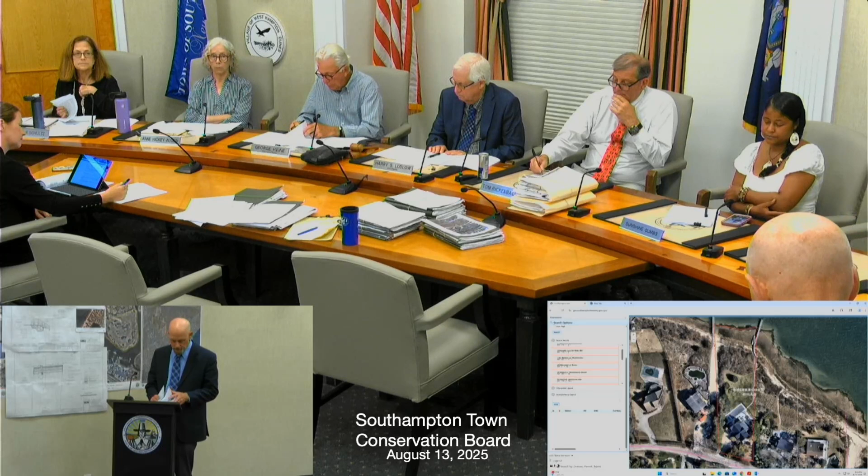As such, I'm recommending that the public hearing requirement be waived. Motion to waive the public hearing. Second. Resolved, the Town Conservation Board hereby waives the public hearing requirement pursuant to Chapter 325, Section 325-80 of the Town Code. All in favor? Aye. Opposed?

A025015, Andrew Perel. This application relates to a property at Seatuck Lane in the Hamlet of Remsenburg-Speonk. There is a preliminary advisory report on file dated August 4, 2025.

There is a small cottage at the property that today is uninhabitable. The former owner had started renovating the house and then apparently decided to sell the property. The new owner wants to demolish the existing home and elevated deck and build the new home, elevated deck and small pool, in essentially the same footprint.

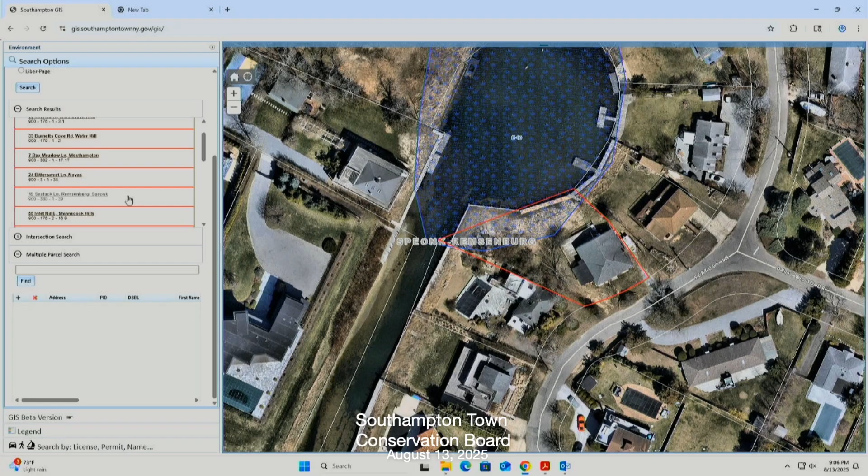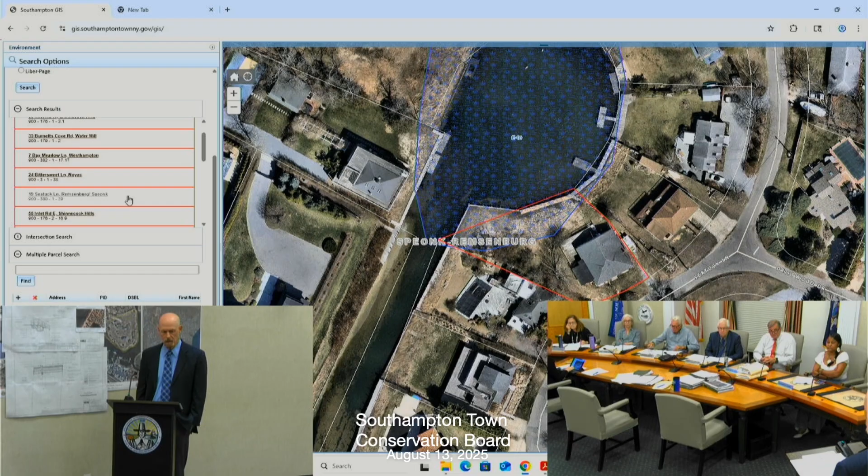Would install an IAOWTS. This is a waterfront site that had been bulkheaded many, many years ago. The low wall bulkhead had almost fully deteriorated, resulting in nearly full recovery of healthy tidal wetlands extending as far as 20 to 25 feet into the property.

Notwithstanding the presence of those wetlands, the applicant, without authorization, began to clear and backfill those portions of the property, was cited, and was required to file an administrative wetland permit application with me in order to restore the site.

Rather than file that application, the landowner submitted a permit application to the Board of Trustees to seek authorization to re-bulkhead the property, received such permit, and was also allowed to heighten the bulkheads and entirely complete the job of clearing and backfilling the extensive recovering tidal wetlands on the property.

While ideally my wish would be to see those bulkheads removed and have the natural shoreline and wetlands fully restored, I'm acknowledging that it is within the trustee's authority to permit a bulkhead.

Rather than ask that the bulkhead be removed, I'm asking that the entirety of the land between the bulkhead and the new residence be covenanted as a naturally vegetated buffer, be fully restored.

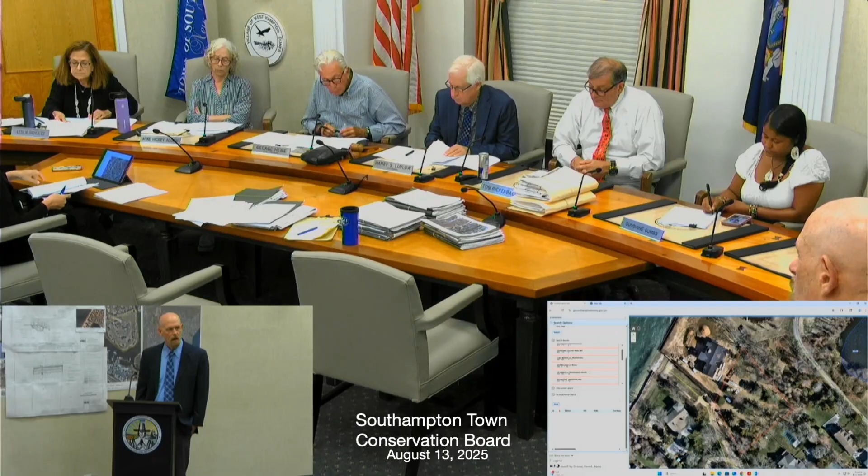The project plans are conforming with regards to the required minimum construction setbacks, with the exception of the tennis court, which would be located as close as 100 feet landward of wetlands rather than 125 feet.

However, those impacts are being offset by establishing a covenanted restored naturally vegetated buffer that would extend at its widest about 120 feet landward of wetlands. That should be sufficient to compensate for construction at less than the required 125 feet.

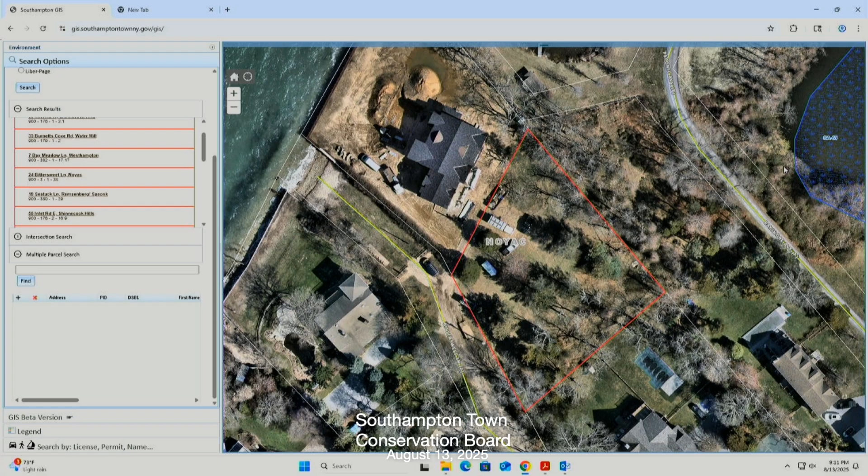The project plans show the expansive buffer and only need some minor revisions, calling for removal of some old existing wire fence lines within bounds of that buffer. The applicant has agreed to the recommended mitigative measures.

As such, we have sufficient information to make a determination, and the public hearing requirement can be waived. Motion to waive the public hearing. Second. Resolve that the Town Conservation Board hereby waives the public hearing requirement pursuant to Chapter 325, Section 325-G of the Town Code. All in favor? Aye. Opposed? Resolution to issue modification, CB 23004.

Stephen Harwin and Phyllis Harwin.

The applicant is seeking a modified wetland permit for residentially developed property at 7 Bay Meadow Lane in the hamlet of Westhampton. The property fronts a canal that also contains very extensive interior wetlands, as can be easily seen on the aerial photograph.

The original permit was granted in order to legalize changes made to accessory improvements, and to require that an existing drive entry, which cut within a portion of a covenanted buffer, be relocated. As an alternative, the applicant has since come back with a plan that would allow the drive entry to remain in place, but would rectify the loss of covenanted buffer by a 2-to-1 increase in buffer within the northerly portion of the property, thereby offsetting the impacts of the drive entry.

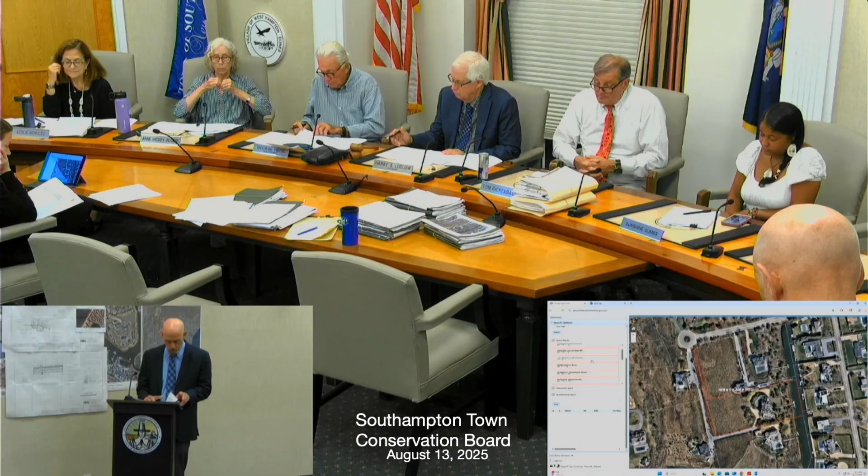This is a property at Burnetts Cove Road in Water Mill that has frontage on Mecox Bay. The board in 2023 had granted a permit to allow home renovations and various deck improvements contingent upon establishing a covenanted buffer.

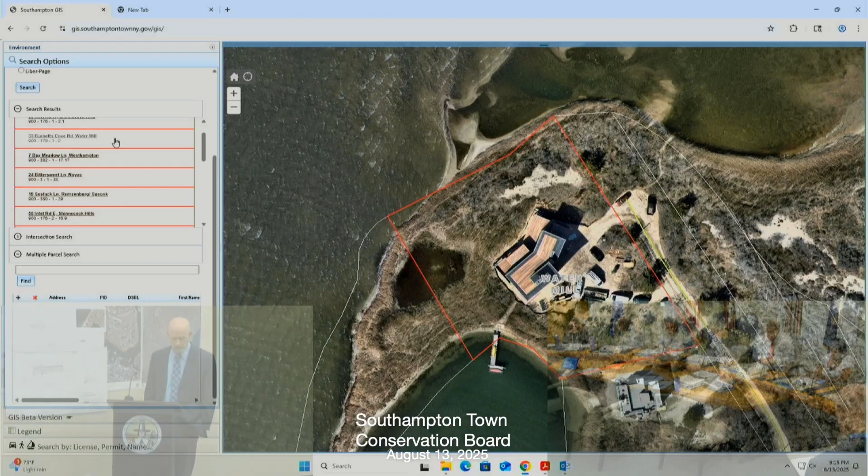The applicant had come back to seek a modified permit in order to legalize the partial demolition and reconstruction of the residence as well as reconstruction of the attached garage. They had also desired to reconfigure the required covenanted buffer and to provide for a new buffer at a 2-to-1 ratio.

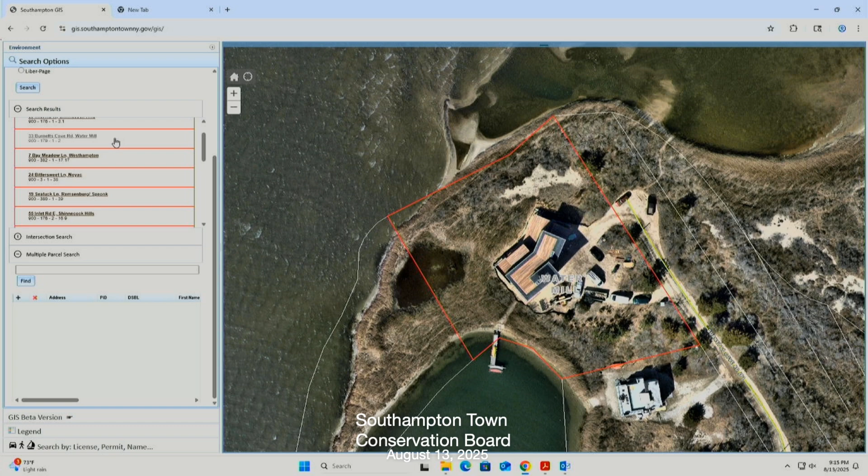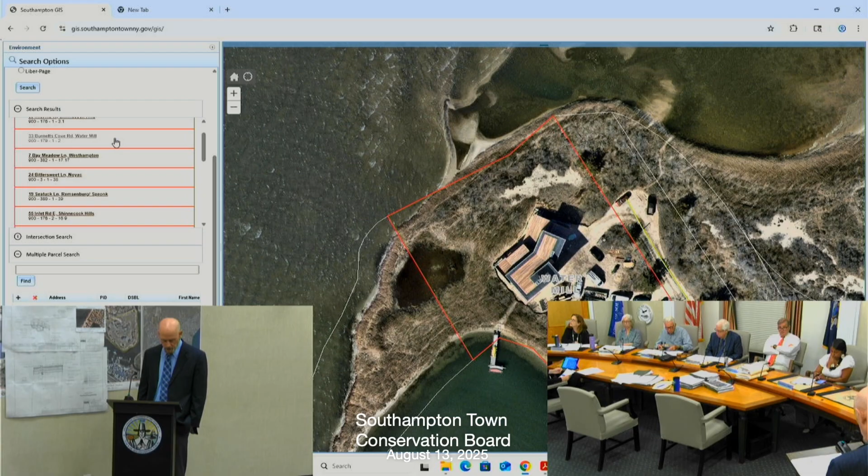That was conditionally approved. However, prior to the applicant coming forward with the requisite revised survey in order to allow for granting of the modified permit, there were additional changes made at the property, namely the installation of a deck-top barbecue, installation of rooftop AC units and a generator, and some additional demolition and reconstruction that occurred at my request prior to bringing this application before the board.

I asked that the applicant provide a satisfactory revised survey as well as a new wetlands and buffer restoration plan, which also calls for native vegetation of other areas landward of the buffer. The requested survey and restoration plan was submitted and deemed acceptable, thereby allowing them to come forward with a second application in order to modify the existing permit.

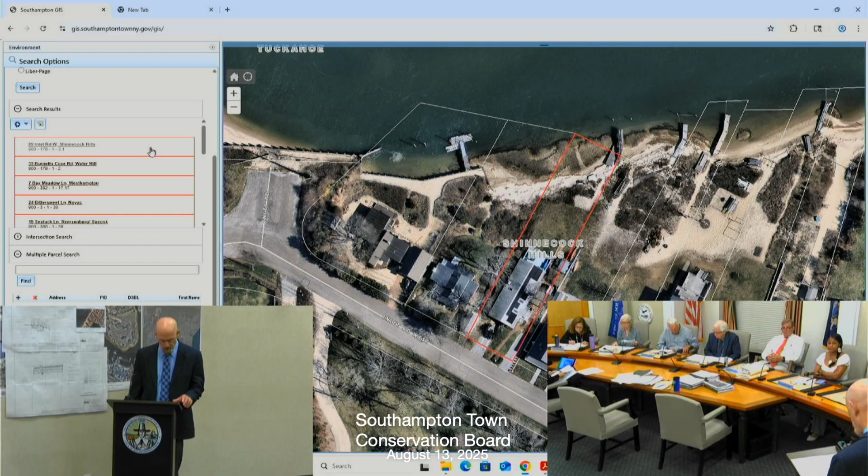Prior to the applicant coming forward with the requisite draft covenant, they had met with me at the property to discuss some minor modifications to the deck and pool footprint, which are consistent with the setbacks previously required by the board. So the applicant is seeking approval of minor project changes through a modified conditional approval. These changes will not result in any new or significant adverse impacts to wetlands.

Motion to issue the modification. Second. Resolved that a wetlands permit modification be issued to Joseph Cerami for the published project on the terms and conditions set forth therein. All in favor? Aye. Opposed? Motion to adjourn.